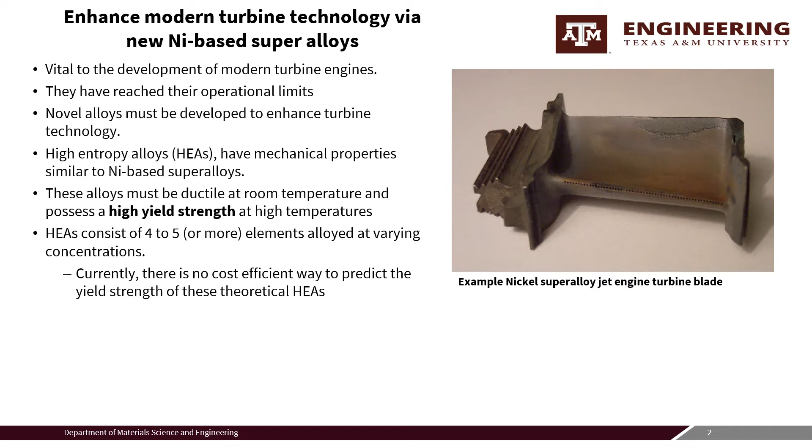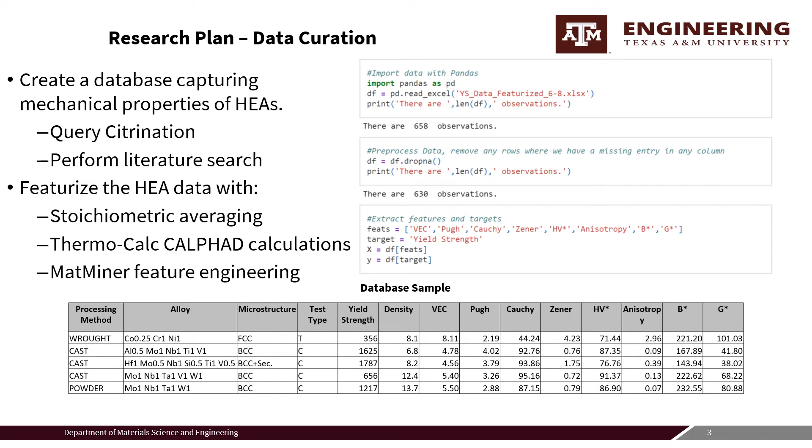The first step of our research plan was to create a database of the mechanical properties of the high entropy alloys. This was done by creating a Python script in order to query Citrination, an artificial intelligence powered materials data platform, which returned a database of HEAs and their properties. This data was then featurized with stoichiometric averaging, Thermo-Calc/CALPHAD calculations, and MatMiner feature engineering.

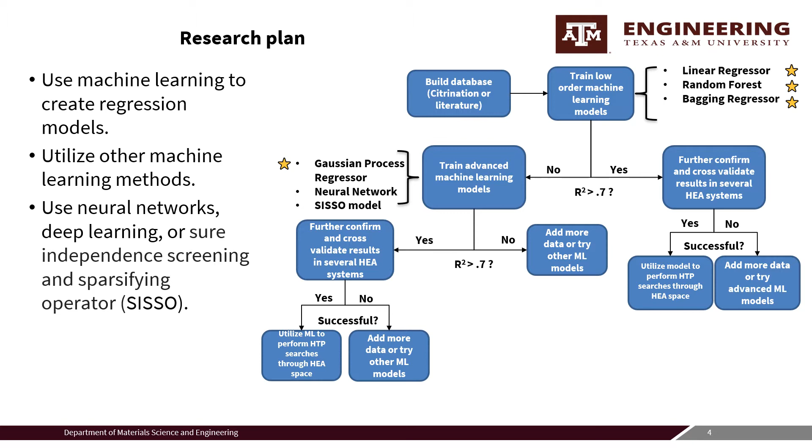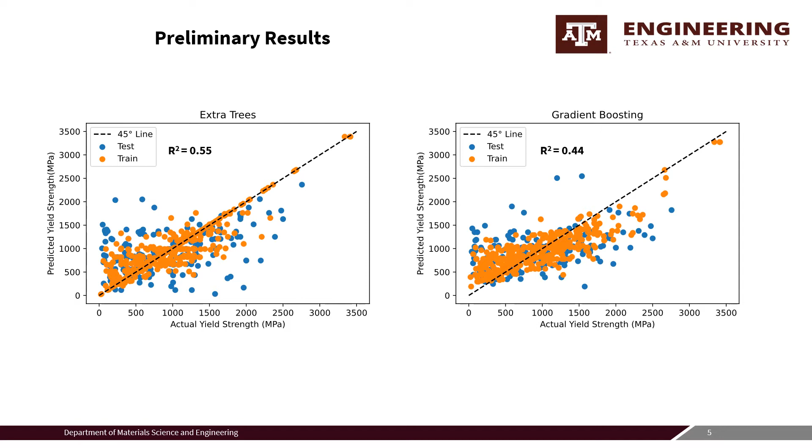The research plan summarized in this flowchart was followed utilizing many different machine learning regression models. Although, even our best performing regressor, the extra trees regressor, did not have an R-squared value greater than 0.7. The preliminary results shown here for the extra trees and the gradient boosting regressor performed decently with an R-squared of 0.55 and 0.44 respectively. This is considering no feature selection was used, no hyperparameters were tuned, and the composition space was not narrowed, which are all methods we can use to improve the performance of these models.

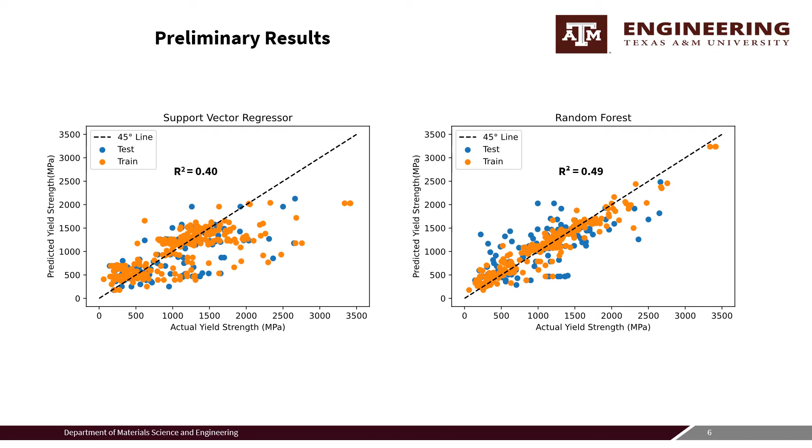These are the next two models that performed pretty well, with the support vector regressor at an R-squared of 0.4 and the random forest regressor at an R-squared of 0.49. These four regressors were then improved by the methods I just mentioned.

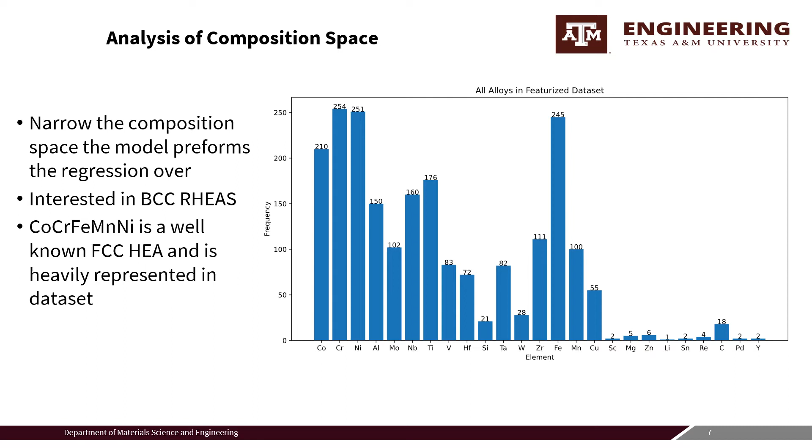In order to improve the accuracy of the four regression models just shown, the composition space was analyzed. This bar chart was created to show the distribution of elements in our dataset. Our primary interest for this project is on BCC RHEAs, or refractory high entropy alloys. It is also important to note that this well-known FCC Cantor alloy, cobalt, chromium, iron, manganese, nickel, is highly represented in our data and may be an alloy of interest in future work.

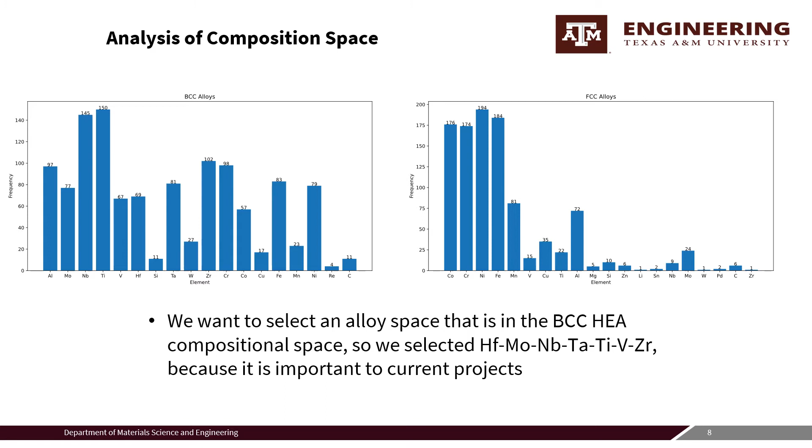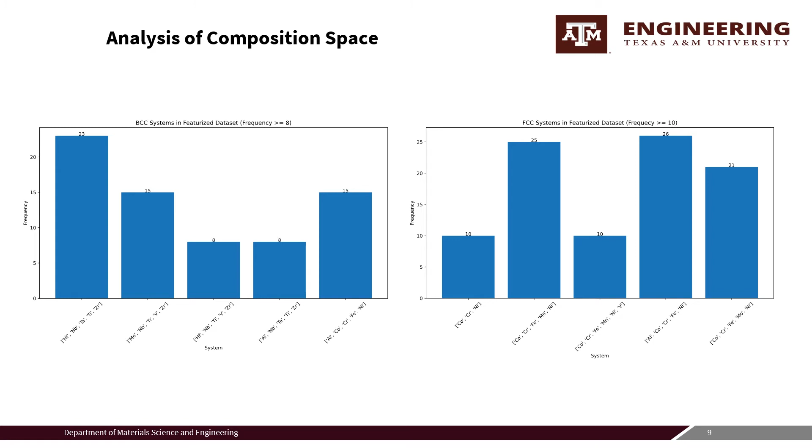Another step in analyzing the alloy space was to look at what alloy systems were present. The systems were again split into two graphs based on microstructure. The first three systems in the BCC graph are of particular interest to us in this project.

Next, we readdress the question, why do we need a yield strength regressor for alloy design? And the answer was that it is needed to predict which regions of the HEA alloy compositional space may contain alloys that have exceptional yield strength. The next question we addressed was, do we need to predict the exact yield strength values, or will an accurate prediction within a set range suffice?

And the answer to this was, an accurate prediction of yield strength is ideal, but given our lack of success with the regressors, a classifier could be used to act as a filter to identify alloys that are likely to have a high yield strength. However, classifiers cannot easily be used for optimization schemes, which means that while a classifier could determine whether an alloy system is above or below a certain yield strength, it cannot determine which of those systems had the highest yield strength.

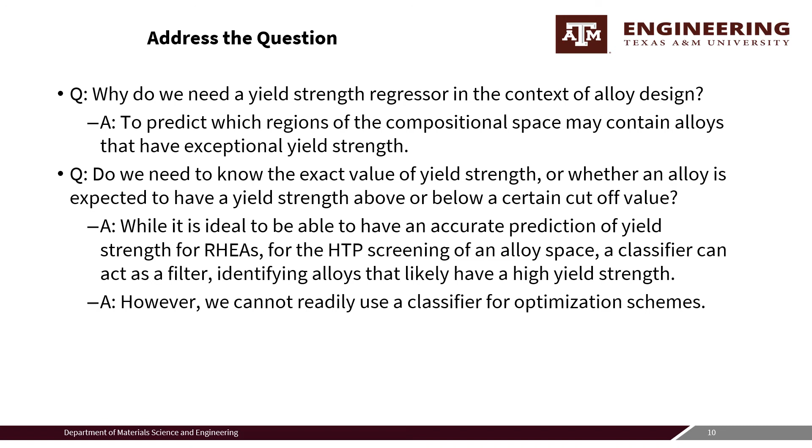Due to data limitations and time constraints, we decided to forego the regressor approach and reframe the problem as a classification problem. The question we built our classifier around was this: is the yield strength greater or less than 400 megapascals at 25 degrees Celsius? The classifier was also not limited to the alloy space chosen earlier for the regressor models, and this is because classifiers work better with a large design space.

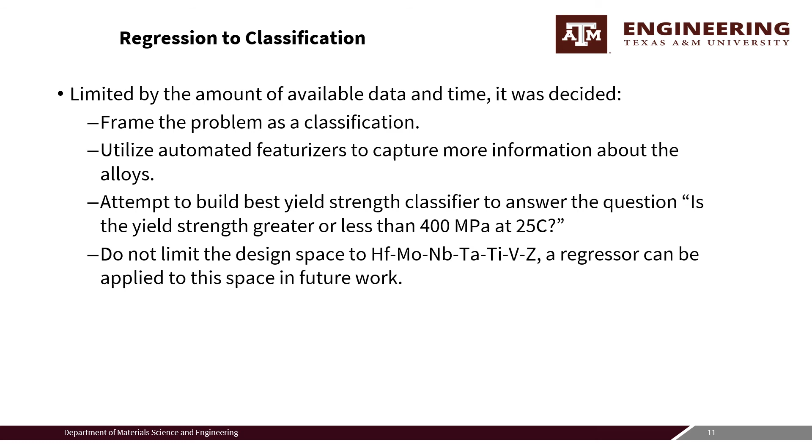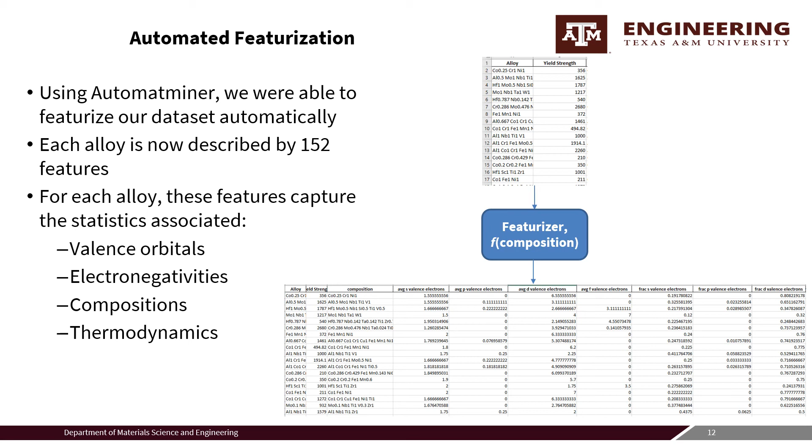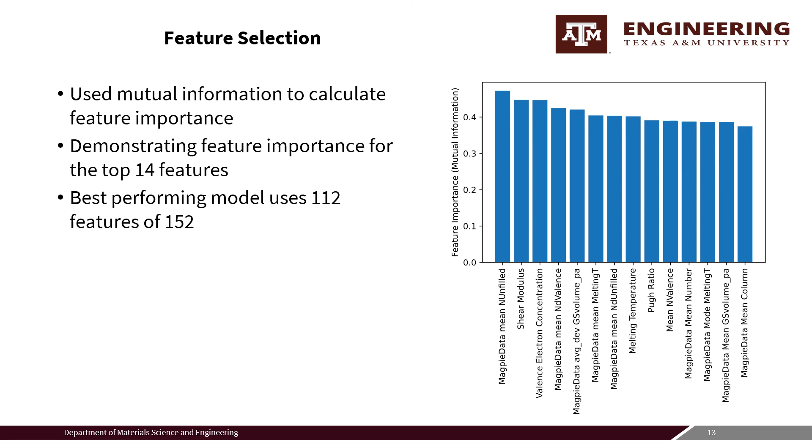The data was featurized automatically using Automatminer, and we ended up with 152 features for each alloy system. Some of the added features are associated with valence orbitals, electronegativities, compositions, and other thermodynamic properties. Feature selection was then done using mutual information. The bar graph shown demonstrates the feature importance of the top 14 features, and the best performing model utilized 112 of the 152 available features.

The best performing classifier was the random forest, and it had a cross-validation receiver operating characteristic area under the curve score of 0.89. This isn't a perfect score, but the random forest classifier is still able to pretty accurately predict yield strength over a large compositional space. It is also important to note that through principal component analysis, it was shown that the first two features do not capture all of the variance in the dataset.

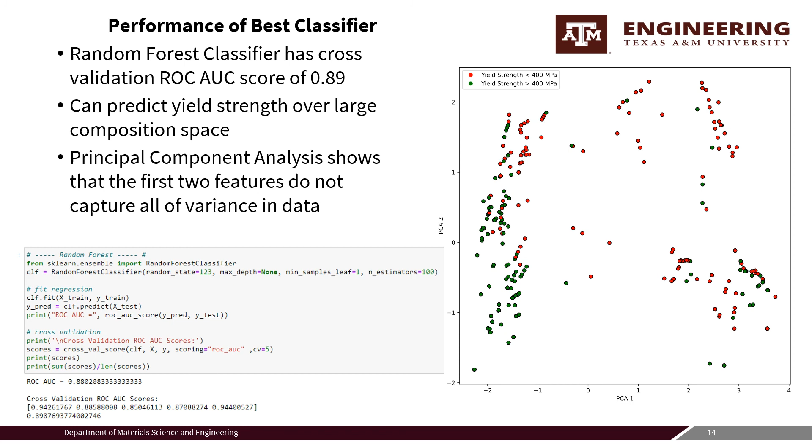In conclusion, while the regressor models failed to meet our specifications, primarily due to a lack of data, a classifier was successfully built that can predict whether a refractory high-entropy alloy will have a yield strength above 400 megapascals at 25 Celsius. This classifier can be modified to be a regressor whenever more experimental data becomes available. HEAs and RHEAs are still relatively new and unexplored, so there is a limited amount of data until more research is conducted. The frameworks that were created in this project will be of great use when more data becomes available.